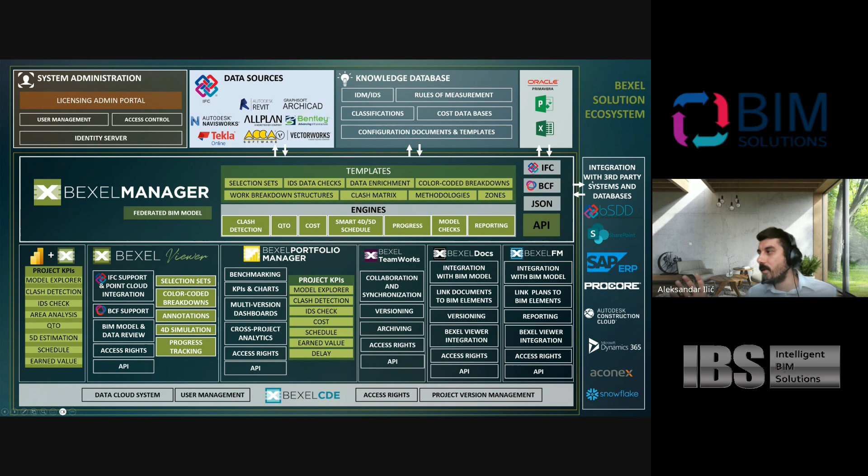Also, we have an open API that allows you to integrate with third-party applications. So if you're using an ERP system, with a small add-in, in a matter of weeks, we can create a direct link between your ERP system and your Bexel Manager solution.

Okay, so our software solution is not limited in any sense to some standardized cost classification system. The system is completely open. If you have your own internal classification system with your own coding, that's completely fine. We can integrate it with Bexel Manager with no problem. And if you're using the same coding system in your ERP, then connecting your ERP and our Bexel Manager is a very, very easy and straightforward thing.

Right now, I'm going to skip to the live demo. This is one of the sample projects which we developed with a company called CGS Labs from Slovenia. They are creating solutions for designing roads and infrastructure projects generally, but the approach is very similar. The basis is basically the same as with Civil 3D. It's creating generic models, which are then automatically enriched with data in their solution.

And in Civil 3D, you probably do that with Dynamo scripts and so on. So this is the same approach, and we can even share this example with you if you want, because this is a sample project that was created exactly for demonstration purposes. So, how our software works. This is some basic infrastructure project, a railroad infrastructure project model that probably looks like any model that you have.

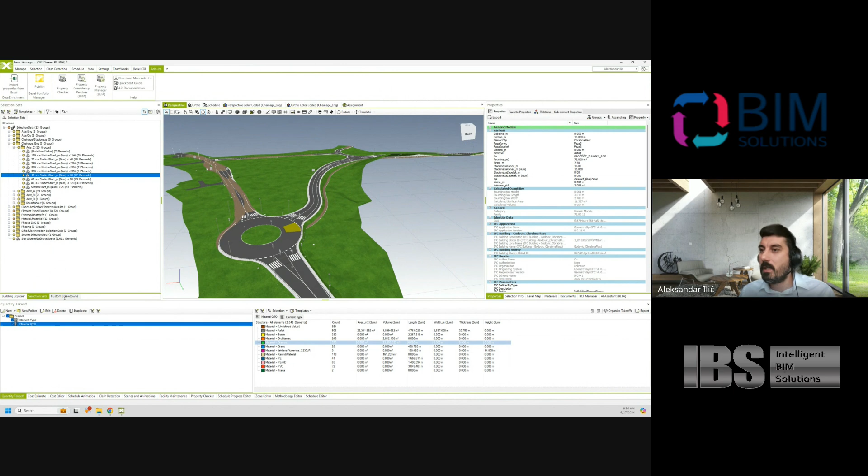The only prerequisite for Bexel Manager, for a good implementation I would say, is that it is modeled in a certain way. So now I'm giving you recommendations that the model is subdivided. Let me just find some of the examples. Let's say that it's subdivided in sections. Why? Because when you're planning your linear projects and executing them, they're going to be executed in sections of 20 meters, 50 meters, 100 meters, whatever the technology of execution is. So we always recommend to designers and to people starting to implement BIM: when you're building your model, try to cut it into sections, because then your schedules are going to be much more realistic.

Because if you have a stretch of road that is 5 kilometers long, and you say that this 5-kilometer stretch is going to be executed in 6 months, then you don't really have good control of your schedule. After the third month, it's going to be very hard for you to know if this is really going to be accomplished in 6 months. But if you are subdividing your linear projects into smaller pieces, then you can have, I would say, time gates.

That's how we call it basically, so that you know that, okay, this one stretch of 20 meters or 50 meters has to be executed in a week or 2 weeks. So you have a very clear idea if the people on site are meeting their milestones or not.

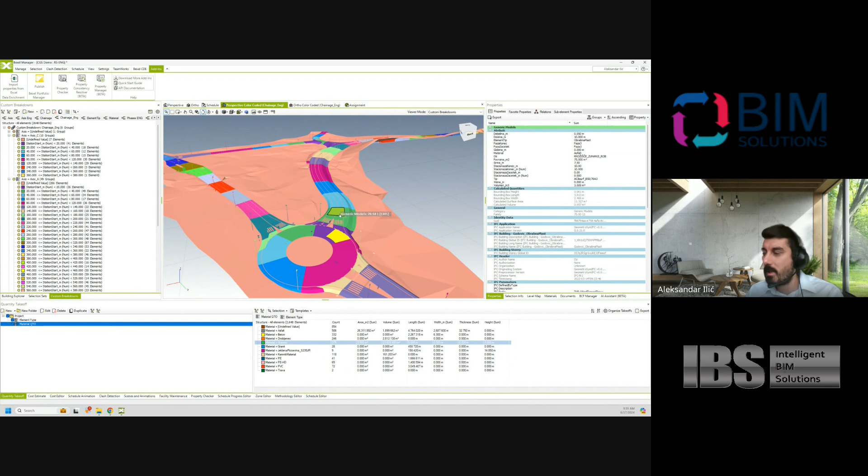And if they are not, then you can react, you can talk to them to see if you have enough resources, if you have enough time, if you have a good planning, if you have a problem with the sequence. You can immediately react and you can immediately see where the problem is.

Some of the basic information that is relevant for the infrastructure project, especially linear, is just a set of parameters, and you can see it here. So for this specific project, it's like 15 different parameters, so nothing too big, I would say. What is important here is that we specified element type. This could be element type or the cost code.

It doesn't matter. You just need to classify your elements, especially in the infrastructure, especially if you're using a tool like Civil 3D. It is important that you have some sort of parameter that differentiates excavation, backfilling, curbs, asphalt layers, and so on. So it is always good to have a system, and I guess that you have one, that differentiates different types of elements, or to which cost group it goes.

That's also okay. Maybe you could have a code 1006, that means this is the asphalt, or 1007, that means this is the excavation. That's also valid. Any approach that differentiates, I can even show you here. So in this specific system, this is a project from Slovenia, we have element types. So we know exactly which element is which element type.

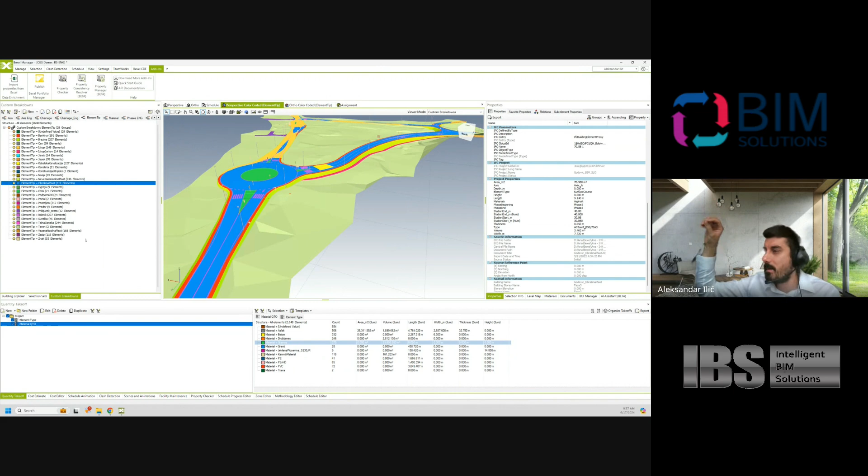So we can differentiate them, and then when we do the cost integration, we can actually know, okay, these elements are the asphalt layers, these are backfilling, these are traffic lights, and so on. So that is the first set of information that needs to be in the project for good coordination: classify your elements, it doesn't matter what the classification system is. It could be completely internal, like in this case, specific for that market. So there's no limitation in that term.

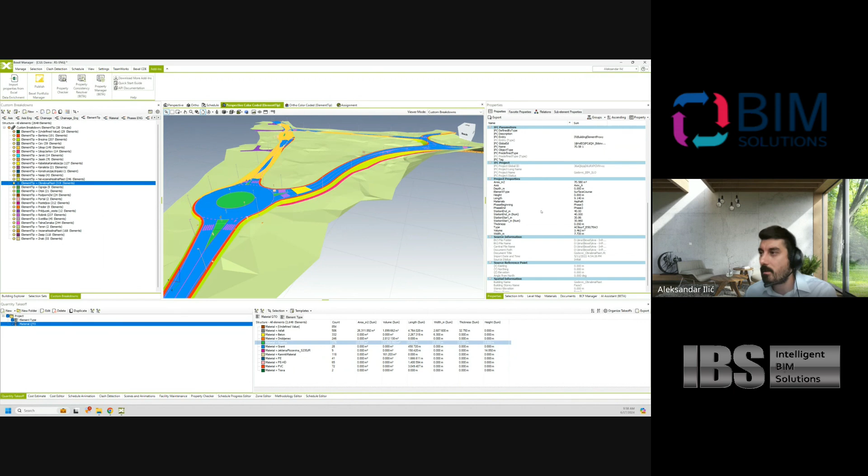The other set of properties are, of course, quantity properties. You have to make sure that you have the proper quantity for calculating that specific type of element. If it's asphalt, you probably need area, because without area it makes no sense. Maybe in some cases you need also volume. If it's concrete, then you almost certainly need volume. If it's a curb, you need length. So you need to make sure that all those specific types of elements have the proper quantity calculating property.

Another important thing is axis. That's also important in linear projects, if we want to manage them properly in BIM, that you differentiate different axes of your project. In this specific case, those are axis A, B, C, D. It could be the main highway axis, then some access roads, then some railway line that goes across. It is important that you differentiate different axes so that you can even plan them as separate axes, because you're probably going to attack them in a certain sequence.

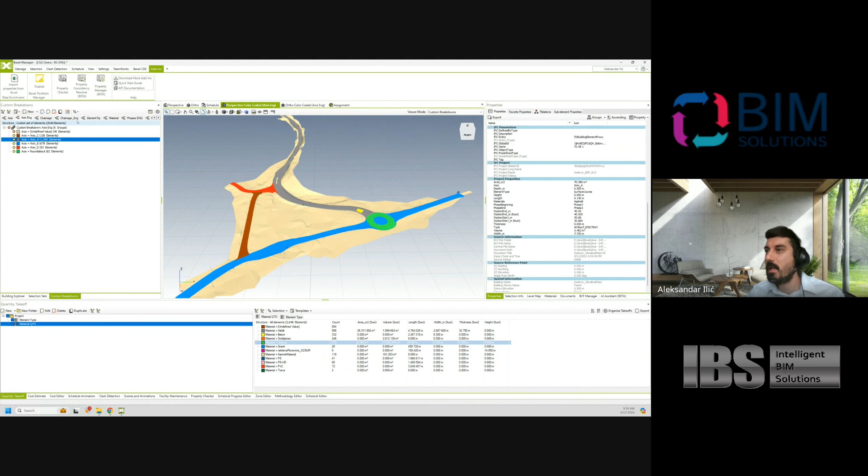And the third very important part is chainage. Chainage system means that every element on your axis has chainage. We call that stationage in this part of Europe, so we use more a French word. English call them chainage. I'm not sure how you call it in your part of Europe, but that is basically just the number that says that this element starts plus 200 meters from the beginning of the axis and ends plus 250 meters from the beginning of the axis.

And with this set of data, we can ensure that integration of the cost, the schedule, progress, or anything in BIM with our solution is very easy. So in this specific sample project, we got the model that has all of this data. We got the cost classification.

I'm going to show you how it looks. It's a completely custom cost classification, not a standardized system. It's a unique system that this specific company uses in Slovenia. So their coding, their naming and descriptions, their quantity formulas, they specify everything.

They deliver this in the Excel format, and it could be very easily integrated in our system. At every moment in Bexel Manager, you can export and import cost classification into Excel. Let me just show you how it looks like. If I do this live, let me just open it.

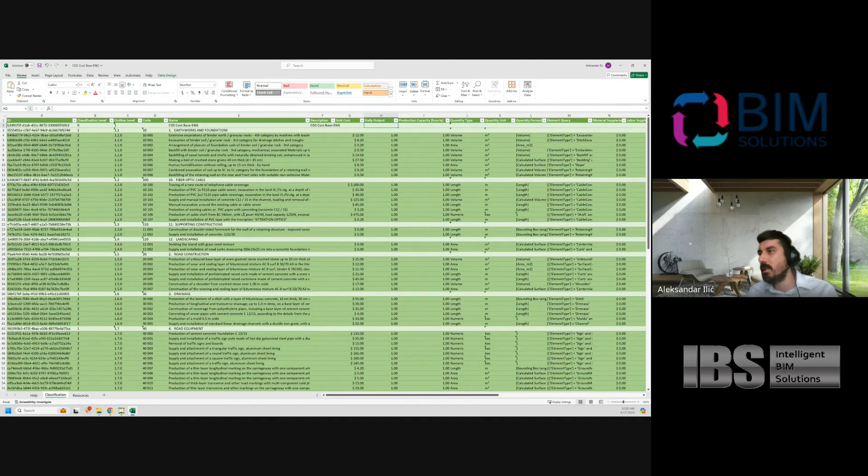Okay, this is how the cost classification in Bexel Manager looks like in Excel. So basically, any cost classification that you're using, we can simply reorganize it to be machine readable for our software. That means the code is going to be in the D column, the name in the E column, description in F, daily output in H, and so on, unit price in certain parts of the cost class. So we just reorganize it, reassemble it in order to be readable in our system, and then we import it in Bexel Manager, and it could be connected to the model.

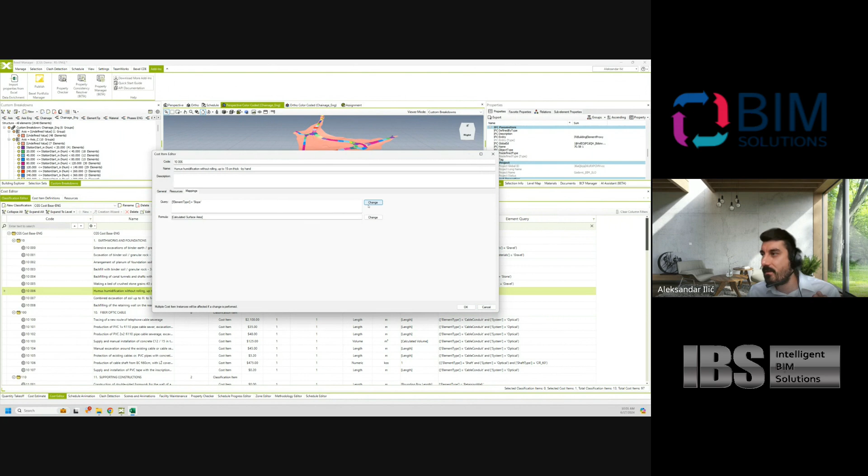How is it connected to the model? It's a very simple process where you simply specify which elements are eligible for that specific cost item. This could be as simple as, if you classify your elements by codes, for elements that are excavation of binder soil, you can just select those elements and add a property called cost code, and it could be 10001. And then our rule is simply: find me the elements where the property code is equal to 10001.

Or in this specific project, we got from the people who actually developed the model a table that says, for 10001, we need element type to be ditch excavation and material to be gravel. So if you find the element with the combination of properties, element type is ditch excavation and material is gravel, then it should go to the cost item called excavation of binder soil. So this rule is very simple.

It's very simple to assemble in Excel or directly in Bexel Manager, simply using the functionality where you say, find me the property value where element type equals or starts with or contains or ends with a certain value, and I can very simply filter out the elements that are eligible for every specific cost item.

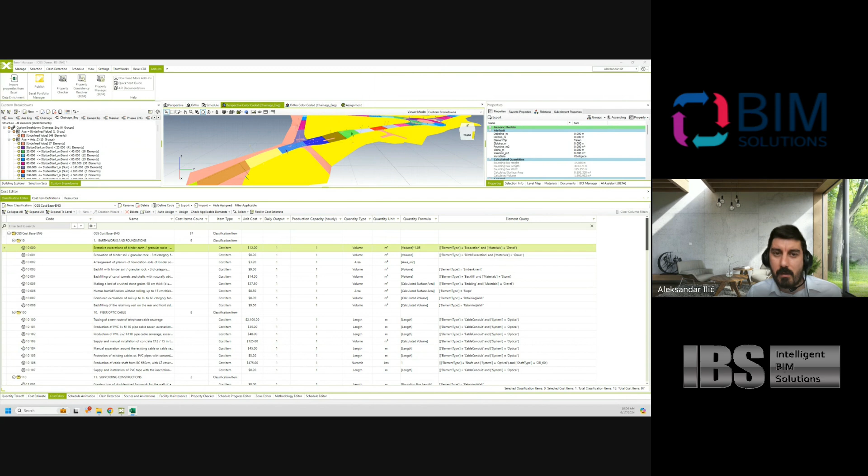And the great thing that I like about cost integration is that you can always export this to Excel and then import it back. So you can change it in Excel. You can see it right now. If I export this again, you can see that this change in the quantity formula is already there. Let me just open this new Excel. Yes, it's here. You can see that for that cost classification, I changed the quantity formula. It's already changed.

And if I change it in the next one, let's say multiply it with 1.1, and just save this, and then import back to Bexel Manager. Sorry, not this model. If I import this back to Bexel Manager, import cost classification, I go to desktop and find this example that I just changed. It just overrides the quantity formula. So everything you see here could be changed in Excel and imported back to Bexel Manager.

It's very easy to change it. And I would say that engineers are very used to this system. You know, it's easier for them to do something in Excel, import it back, than to go and do it inside the software in some cases. In some cases, it's easier to do it in software.

So this is how you import your classification system. So you specify here your unit cost, you specify here your quantity unit, quantity formula, element query. Then you simply auto-assign this to your model. This means that when you auto-assign it, the system will go through your model. It will find the elements based on these rules that should go to every group of works.

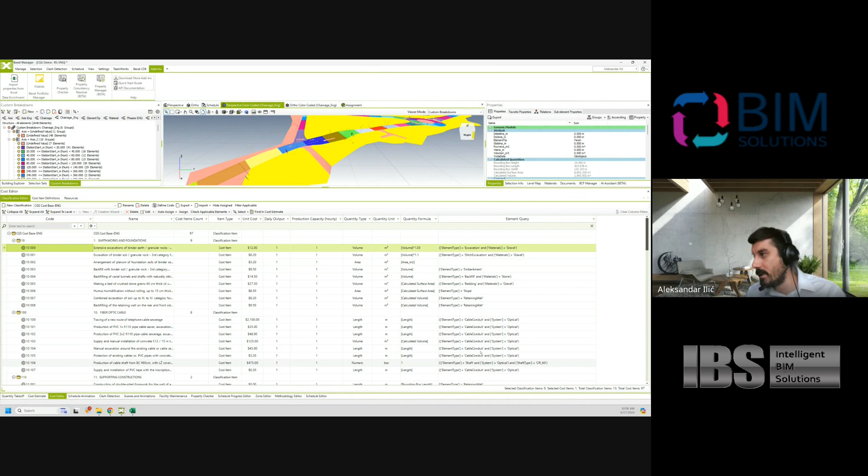It's going to calculate their quantity, multiply it with their cost, and it's going to create the budget. And you're going to get the budget like here. And this is the simple example where we don't work with the resources.

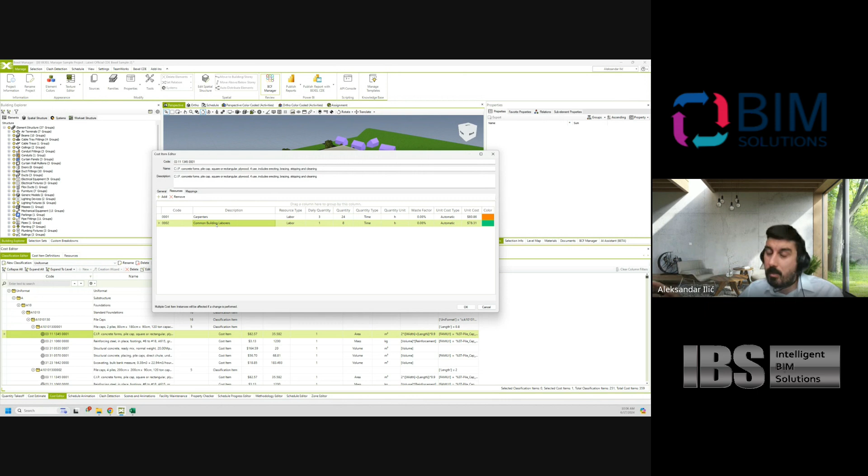I'm going to show you an example that is not from infrastructure, but again, it's a similar system where you have the ability. If you go to the cost editor and you find the Uniformat, you have the ability to assign resources directly. So this could be done in infrastructure, high rise, doesn't matter. I'm just showing you the sample that I'm allowed to show, where you can calculate the price of your cost items by simply specifying the price of your resources.

Just would like to add. Sure. So the first way you showed, it means that those prices you are just calculating including everything, and you just set price per quantity. And here it's more detailed planning. It means resource based, labor, machinery, and so on. Exactly. So there are two options of detailing, let's say.

Yes, I would say there are three options, because you see the first system, we just use the simple system where we said the unit price is 12 for the cubic meter. But let's say that I don't have a detailed resources list and detailed prices, but I know exactly from these $12 or euros how much I pay for material, how much I pay for labor, how much I pay for equipment, or how much I pay for subcontractor, because you have very different scenarios.

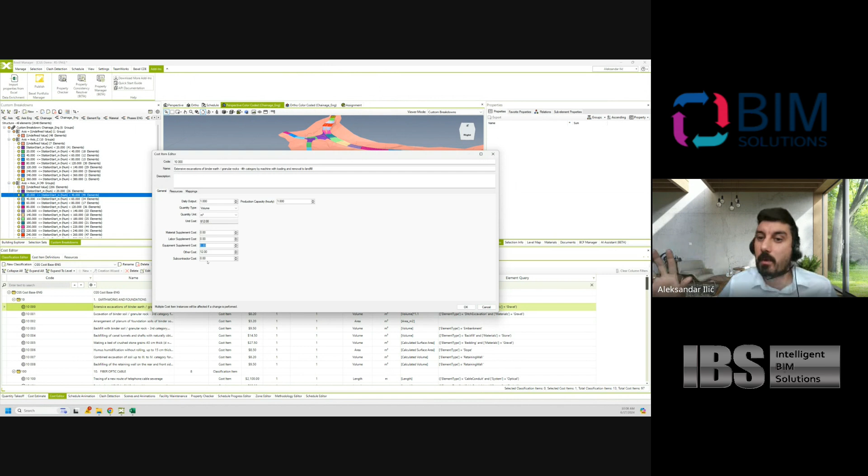If you're an investor especially, you have a situation where you are buying material and you're paying a subcontractor to actually construct it. So you don't have labor or equipment. That's not your cost. You have material cost and you have subcontractor cost.

But in some cases, maybe you know that for 1 cubic meter of excavation, you don't have material at all in that specific case, but you're gonna pay labor, 30 euros per cubic meter. You're gonna pay equipment $0.5 per cubic meter, or whatever you calculate. That's also one of the approaches, between what you said, price per quantity and price by resources.

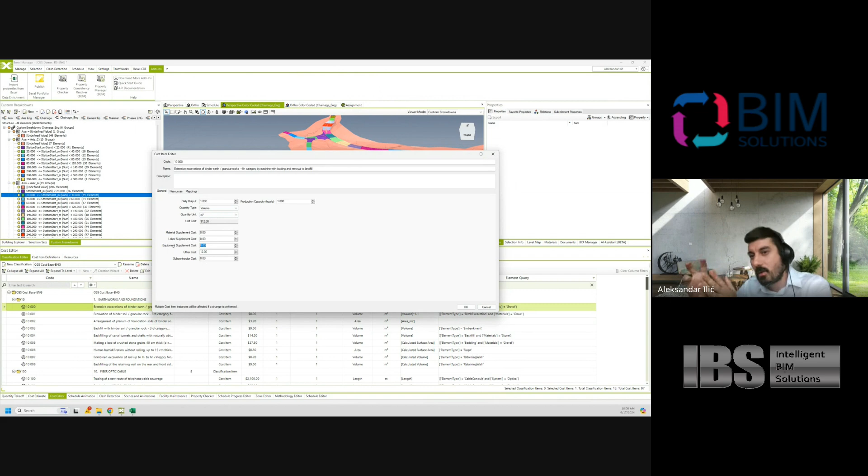This is price per supplement, when you don't have a detailed idea about the resources, but you have an idea which percentage of your unit cost goes to materials, which one to labor, which one to equipment, and which one to subcontract. So then you would just simply create your resources list and specify, this is the labor resource, this is the equipment resource. You have coding for those resources as well.

And then in your cost classification, for every cost item, this is budget. So if you go to cost classification and go to any cost item, you can simply add the resources from your resource list, and you can specify, for 1 cubic meter of excavation, I'm using 0.5 hours of work of my common building labor. I'm using 0.15 hours of work of the supervisor. I'm using half an hour of work of the excavator.

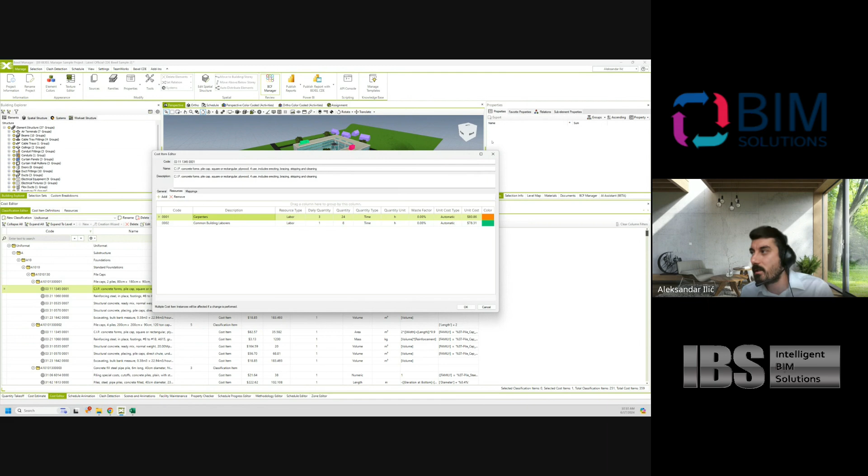I know the prices of these. I can add the waste factor as well, because maybe I'm wasting some time and so on. And then your unit price in that case is calculated directly based on your resources. And whenever you change the price in your resources list, the price will be recalculated for the cost items as well. So the costs are directly calculated

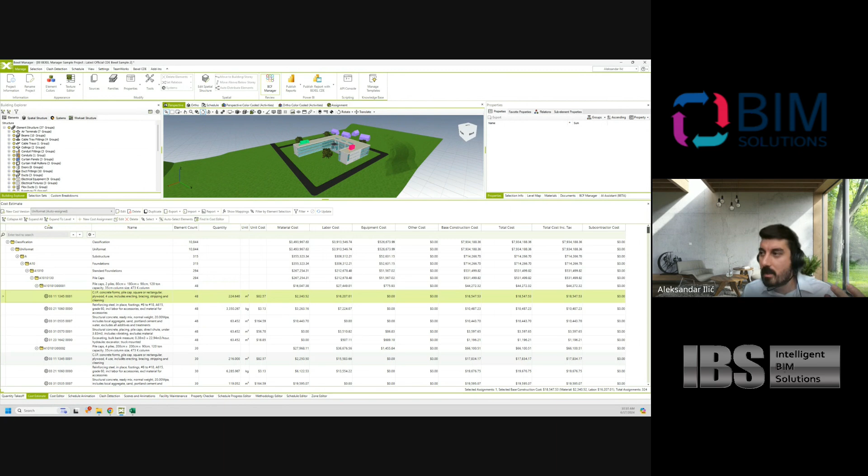from the resources there. And when you create your budget, you can see exactly which part of that cost item and overall budget goes to material cost, equipment, other costs, subcontractor, and so on, based on the resources that you specify. So that is very important. And those resources are going to be visible also in the schedule, which is a very important thing as well.

So let me go to this actual schedule task report. You see, of course, the cash flow, the cumulative cost, so you see the money, but you're also going to be able to see resources.

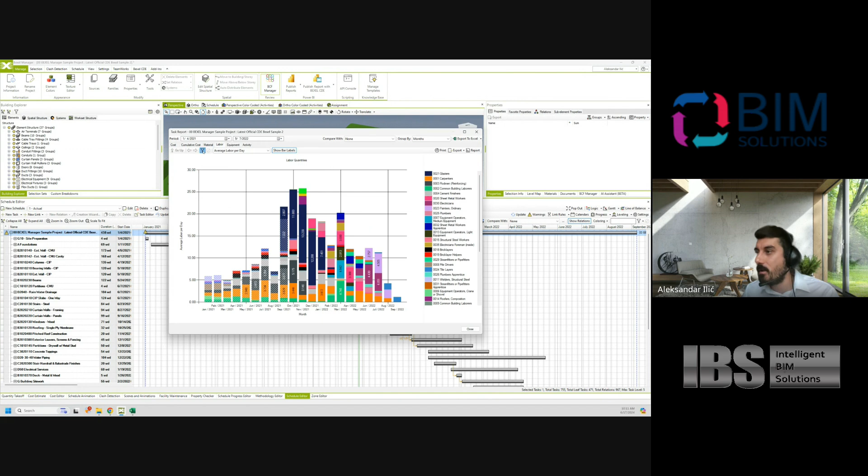So you're going to see, let's say, if you check carpenters, how many carpenters you're going to use with this schedule every day of your construction. You see that this is not optimal use for this specific project - you're going from 1 to 1.5, then jump to 2.5, then back to 1, and so on. So obviously this was not a very good schedule in this example, because your resources were not leveled.

What is also great about our software is that we have resource leveling. So you have the ability to say, maybe you have 3 excavators that could work 12 hours a day - that's the amount of hours you could have because you have, say, 2 people working in 2 shifts and so on. And you could create your schedule.

In order to determine realistic duration, you can select the tasks for the excavation, for the site preparation, and say that for these tasks I could limit daily output to 12 hours of excavator, and it's going to extend duration based on the quantity of excavation from the model and the available resources you have.

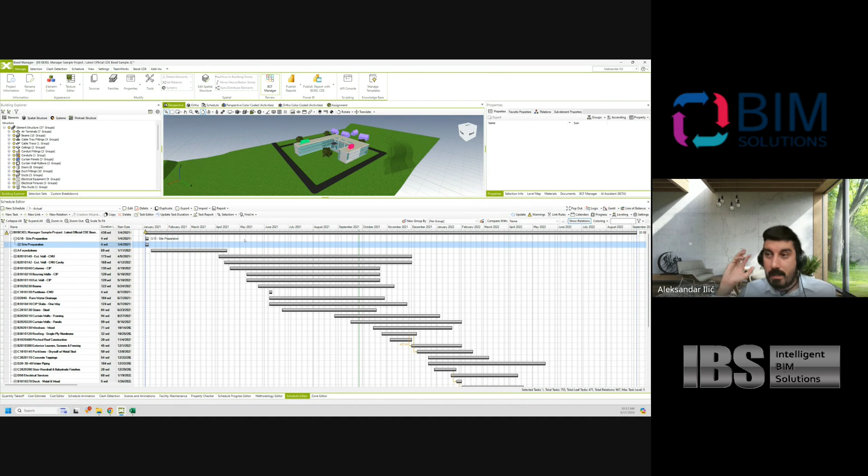Again, there's no limit in terms of whether it's an infrastructure or high-rise project. The cost implementation system is the same, the scheduling system is the same, and you're going to be able to see both. The only question is whether you have this data - your resources and detailed cost classification specifying how many resources you use for every different cost item. There's no problem integrating it in Bexel Manager.

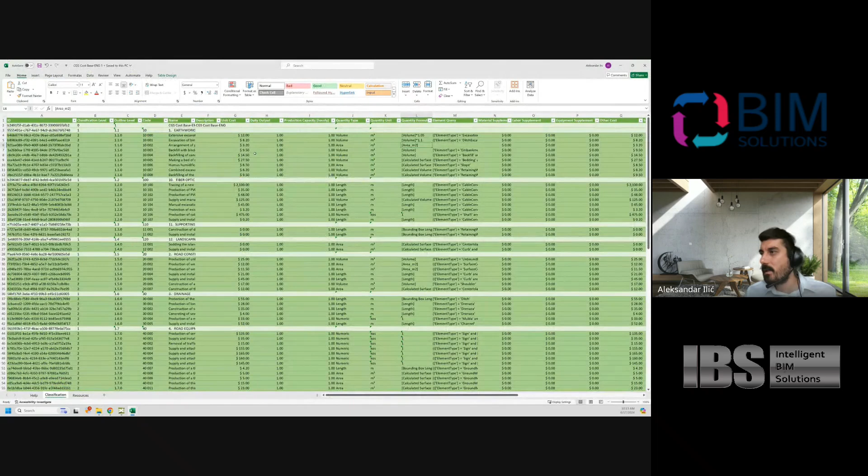And again, if I go back and export this to Excel, the same as we did with the linear schedule - if I export to Excel, to cost classification, this specific cost classification just opens directly here. So I'm going to open this Excel file. You're going to see that the resources could also be managed in Excel and then imported back to Bexel Manager.

So for every cost item, it specifies the resource - carpenters, common building laborers - how much time you're going to use for which daily output. So how many hours you use for which daily output, for how many cubic meters of concrete. You have your detailed resources list here, and you can change this.

Maybe on the next project you have a different company delivering you concrete because it's in a different part of Lithuania - they have different prices, different capacities. You just go and override this, import it back to Bexel Manager, assign it, and it will automatically change your budget. What is the main advantage of this approach?

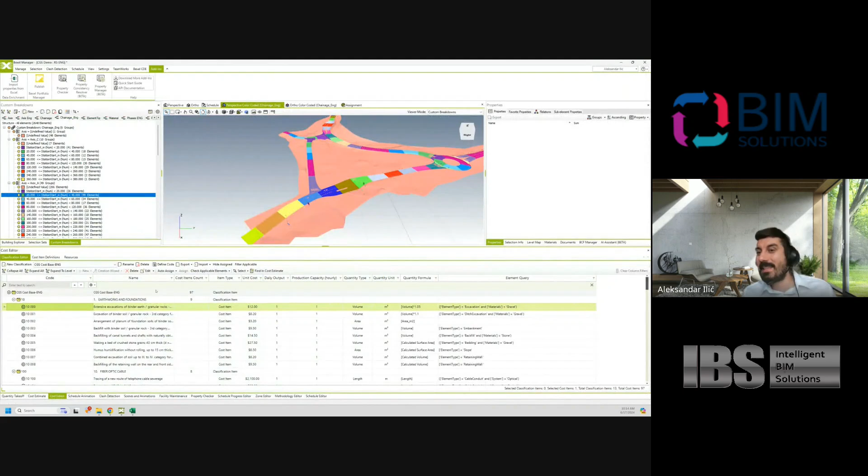Because people always ask me, okay, but if I have to spend time to develop the cost classification, to integrate it, to assemble the rules and everything - yes, it's going to take time on the first project. After that, you simply export this, send it to the next project, and people could use it right away.

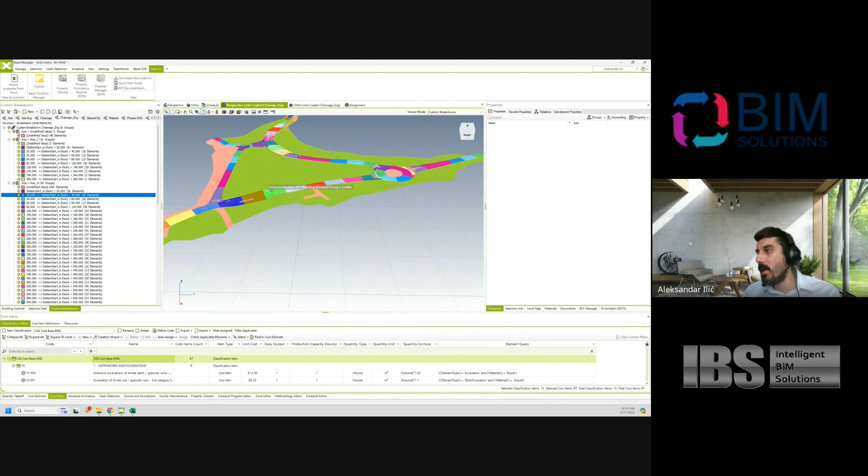Also, the first time - when people send you changes and say, okay, we had some problems buying the land, so we had to reroute this axis a little bit - instead of you going and recalculating everything manually, you just update your project, simply click refresh, and it's going to automatically recalculate your complete budget, recalculate everything in the schedule, and you're going to get everything updated with a few clicks.

And then with the first change, you're going to save so much time that it's going to pay off everything that you did in terms of implementation and integration of the schedule.

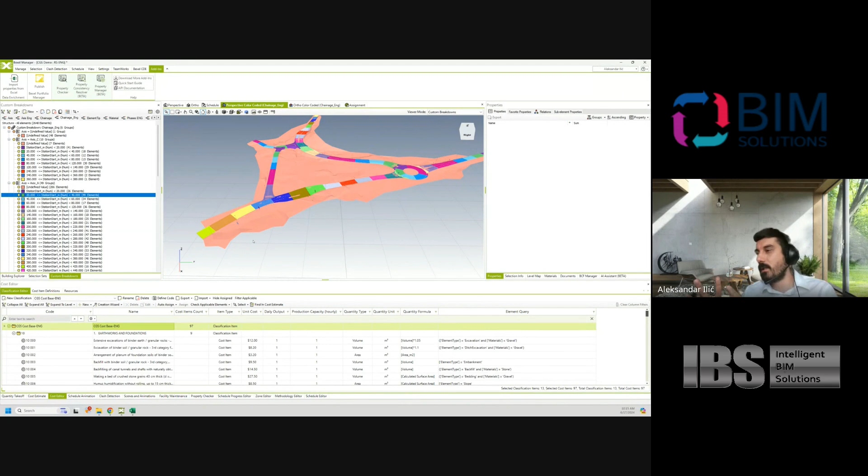So this is about the cost. I would also like to cover a little bit the 4D. So the part of, once you create your cost, when you integrate the cost, creating the schedule in Bexel Manager is very easy. You have two ways.

You can create your schedule in Primavera P6 or in MS Project and import it directly. So you have the ability to import from MS Project or Primavera. If you're used to working in MS Project, you can import your schedule and then link it with the model elements in some intelligent way. Let's say if you have codes for every element showing which task it goes to, then we can automatically map the elements that contain a certain code with the task that contains that code.

The system is pretty similar to the cost system. That's one approach. It's harder if you do it that way, but some people prefer it. Another approach is to create the schedule directly in Bexel Manager, and this is specific to our software only, where you're able to create what we call... maybe I'm going to share it.

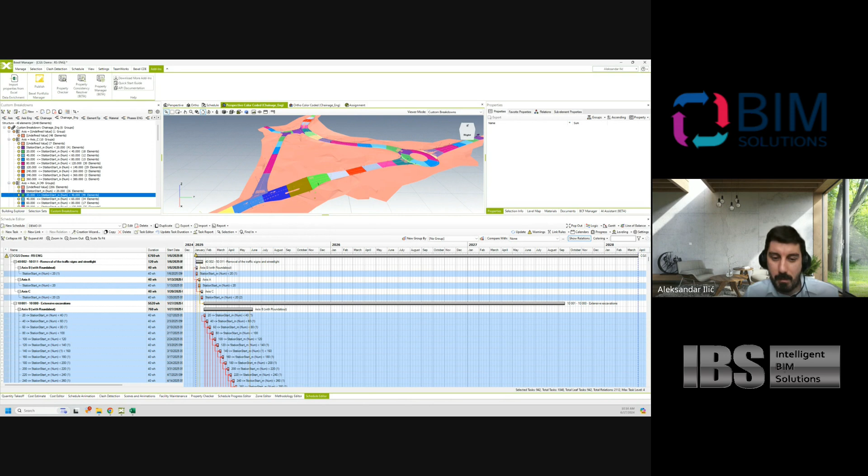The best way is to share my screen to explain how the system works, because I have a very good graphic for this. Let me just do that, and then we're going to return back to the practical example as well. But here's how this works.

Since your model already has cost classification integrated, whenever you click a certain element, you can see which groups of works that element is connected to. So when you click on the asphalt layer, you're going to see exactly that it's connected to the subheading in your cost classification called asphalt, and then you'll probably have different cost items for asphalt of 10 centimeters, 12 centimeters, 15 centimeters. They're going to be built differently, and you'll have different resources and quantities assigned to that specific cost item.

When you go to the scheduling part, what you basically do in every scheduling process is create spatial project organization and work sequence definition. So in this very basic example, if it's a building or multiple buildings, what you'd do in MS Project is create a parent task for building 1 and building 2, and create some relationship between them - you'd say, okay, I'm going to start with building 1, then with a 2 month lag, I'm going to start with building 2.

Then in both of these buildings, you're going to create a subtask for every floor, from the ground floor all the way to the roof. Then in every floor, you create a phase, or takt in German - you subdivide the floors into areas of equal size so you use your resources in the best way. You don't attack the complete floor at once; you work one third of the floor, then another third, and so on. That's your spatial project organization, which is what you'd do in MS Project.

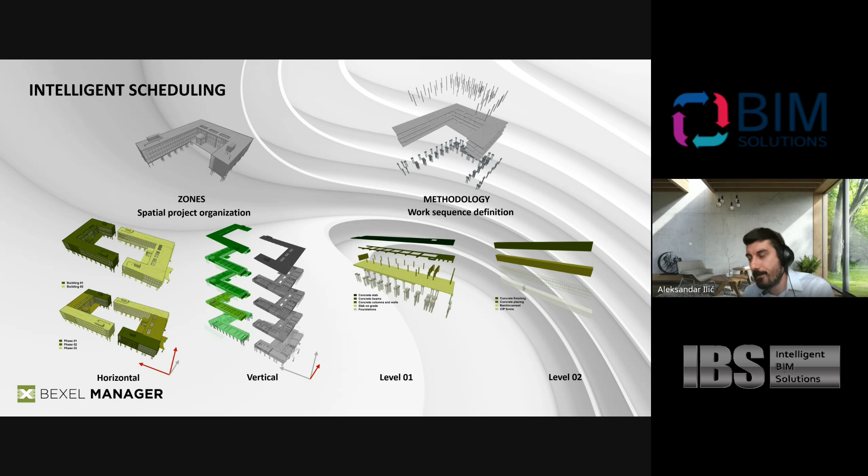It's, I think, 12 kilometers long, and it has a few sections. So it has a viaduct, a tunnel, and 3 different open sections. So what we do is we subdivide them into these sections and create the sequence between the sections.

We're going to start with the tunnel first. Then after we complete 20% of the tunnel, we're going to start with the viaduct. After we are at the half of the viaduct, we're going to start with the open stretches of the railway. Then we subdivided the viaduct and all of these sections into subsections of, let's say, 100 meters, 50 meters, whatever is practical to us. And for every one of these subdivisions, we specify a sequence of work.

How did we do this? We refer to our cost classification system. So if in our cost classification system we have a group of work called excavation, we say first we execute excavation. After excavation finishes, we're going to execute, say, piping for the infrastructure project. So we excavate the trenches, put the pipes, backfill. After that, we do the base layers, then the sub-base layers and compact that, then the covering, the asphalt covering.

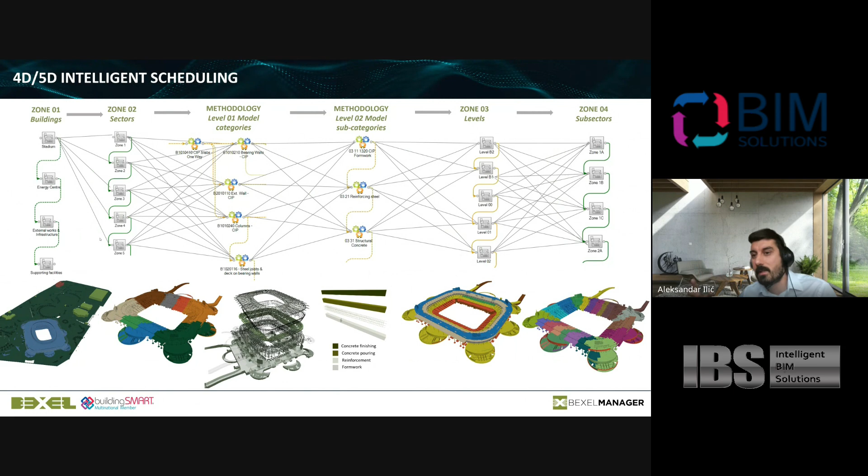This is just one example; we did the same thing for the FIFA World Cup stadium in Qatar, which had over 100,000 tasks and relationships. But we did this in basically a few days because we just specify zones and subzones of the stadium, the technology of execution, which groups of works are executed in which order, and then it just subdivides all of this into a schedule.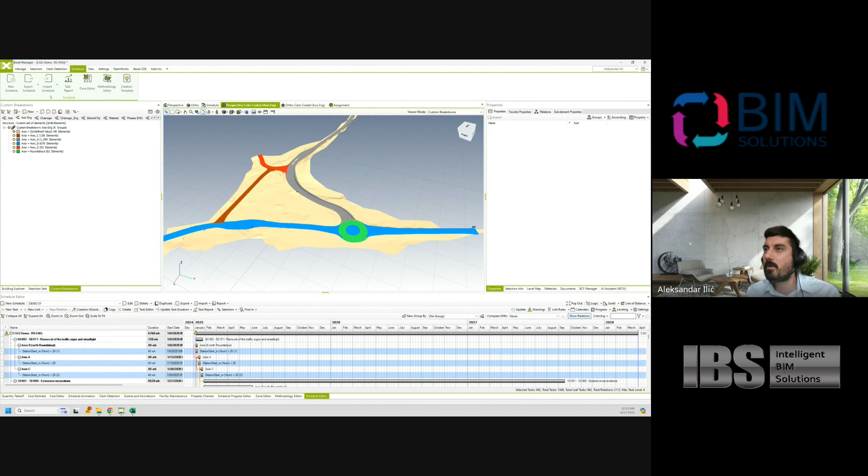So in this concrete example I'm showing you here, we created the schedule the same way. We subdivided this project into axes, so we have information in Bexel Manager that this is axis A, B, C, D. Then in schedule and zoning, we specified the sequence for the axis: we're going to first build axis B, then axis A, axis D, axis C. That's a priority system we specified here, because in this specific part of Slovenia, axis B is the most dominant one.

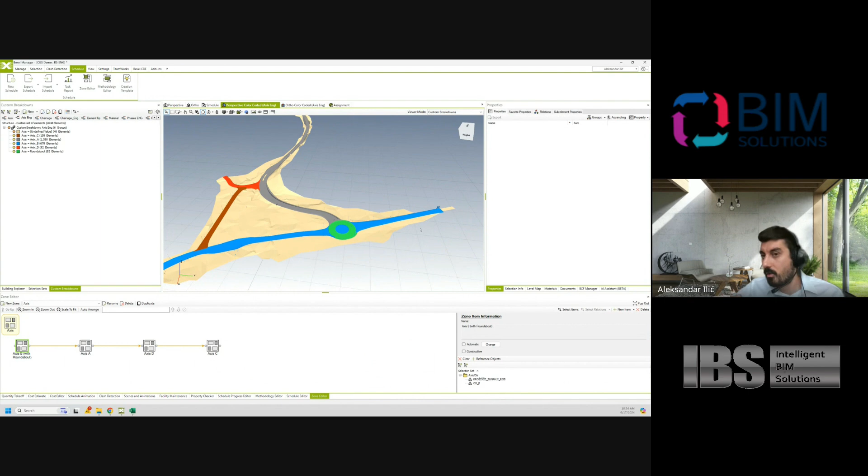So we need to complete the work there so the traffic can go with no problem. Then we have the second priority axis here, and the additional ones are our lowest priority, which we're going to execute later. Then after that, we created a chainage system.

For every one of these axes, we subdivided it into 20-meter sections, because that way we can organize our work into more or less equal amounts of resources and equal amounts of time needed to execute. So we know that, say, we're going to execute 20 meters of excavation in 3 days, 20 meters of backfilling in 5 days. So we have very tight normatives, a pretty clear idea of what we need to invest for this logic. If we just say we're going to execute this 1 kilometer or half a kilometer stretch of road, we don't have a very clear idea of how much time it's going to need.

We have some idea, we have some experience, but we cannot just follow that easily. If you have this as one big stretch of road containing, say, 5,000 cubic meters of backfilling, you'll say we completed 5%, then in a month say we completed 17%. How would you know that exactly? That's going to depend on the people assessing this on site to tell you what they think is the percentage of completion.

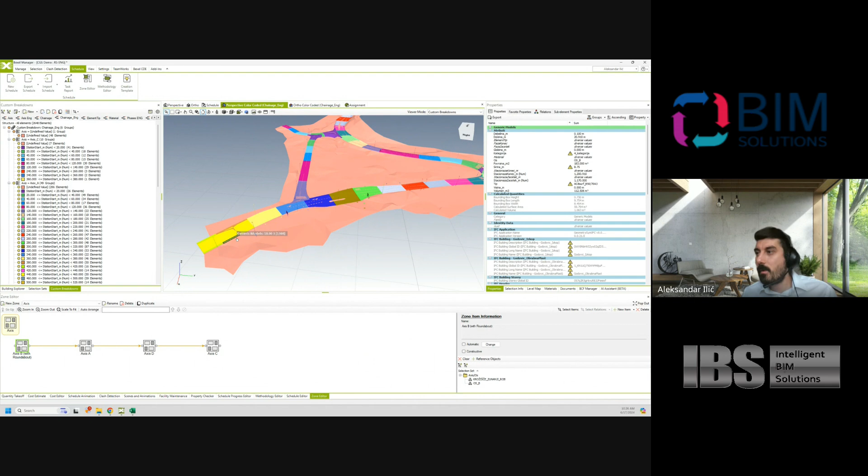If this is subdivided into sections, it's easier. You can say, okay, it's the third week of excavation, this is where we are, this is where we reached. So we know exactly how much this is in terms of quantities, resources, and money, and exactly how much time it took us to reach this specific point of the road, and how that impacted or pushed the other sections to be executed in the following weeks.

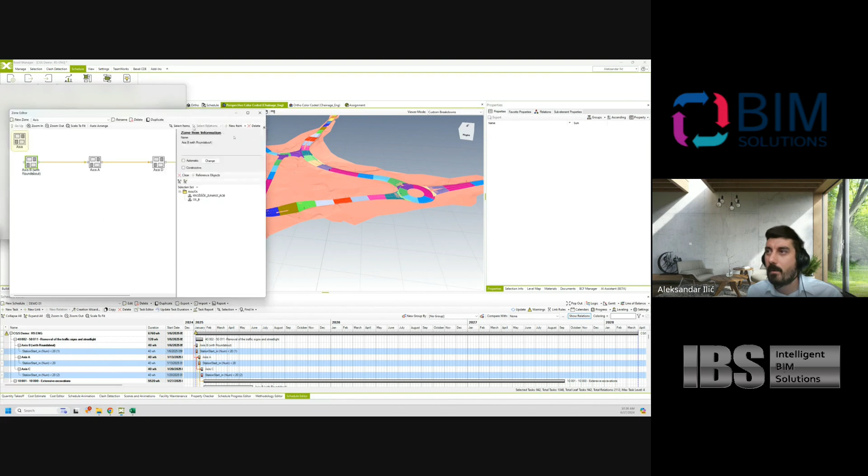So we subdivided this into subsections, and then we go to the zone editor. This looks like Dynamo, it's the closest thing to it. For each of the axes we specify a sequence of execution: we say, okay, we're going to first execute the first 20 meters, second 20 meters, and so on. Just a normal sequence from beginning to end, since this is a short stretch of road.

In some bigger stretches, maybe you're going to attack that 5 kilometers in 3 places. So you'd say, okay, I'm going to start from meter 0 to meter 200 with one team, from meter 200 to 400 with another team, and from 400 to 600 with a third team. So I'm starting at once in 3 locations of that stretch of road. You specify this, and the last part is the methodology, or the sequence of work.

What we did here, we simply go to our cost classification and said what we're going to execute first. In this specific case, you can see removal of the traffic signs and street lights, because there was an old road there, so we first need to remove all these traffic lights, signs and boards in order to start work. After that we go with the excavation, demolishing the old road, then excavation for the trenches. After that we backfill and protect the existing pipelines with concrete, then we install the optic cables, public lighting, water pipe supply. So we just specify the sequence of this work, like in any other road project.

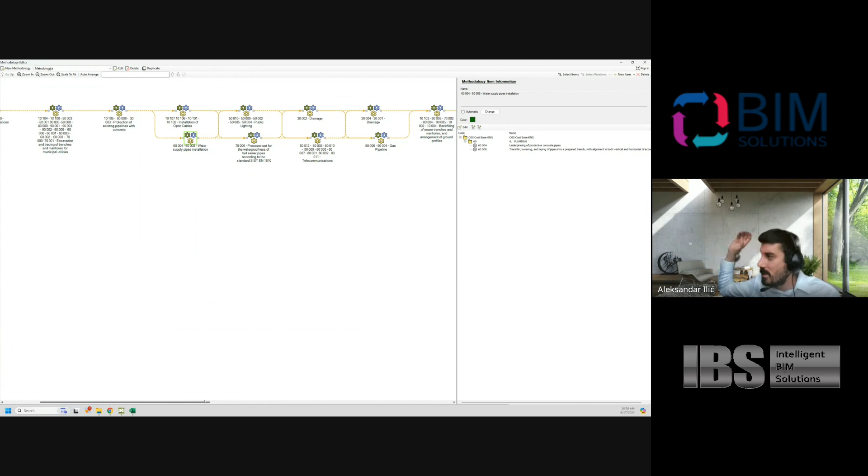You can see, especially for road building, the methodology is very simple. It's very linear, there aren't a lot of branches. When you go with buildings, you need to install, at the same time, electrical installations, piping, sprinkler system, MEP system, supply air, ventilation and so on, so you have a lot of branching there. Here it's pretty clear, you just go one by one in the same area, doing different groups of works.

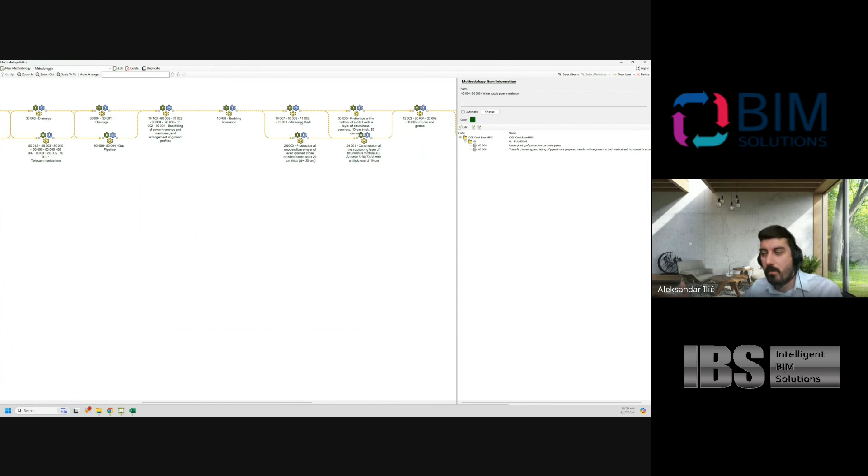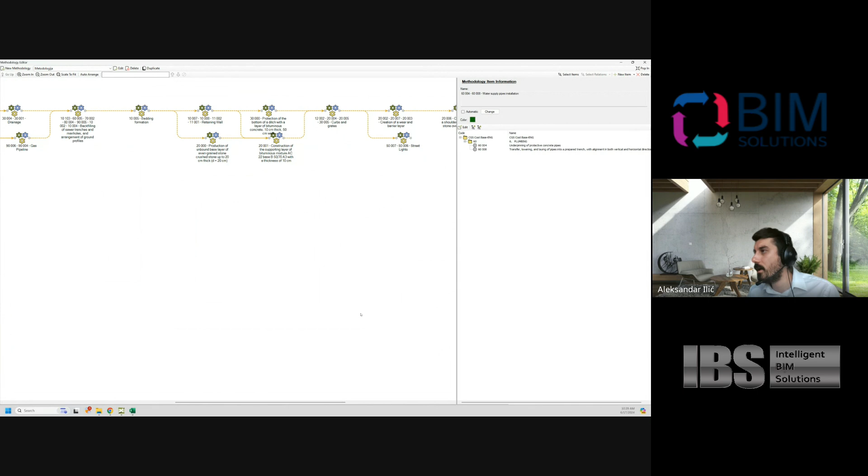After you complete all the drainage, telecommunications and so on, you backfill the trenches. You do the bedding formation, backfilling your base, making the basic layer for the road. You do retaining walls in areas where you have to cut through hills, unbound base layers, and so on. Then you do your curbs and grates, creation of wear and barriers for the cut areas, installation of street lights, construction of shoulders from crushed stones, creating the terrain and waterways, landscaping, fences, road markings, and so on. It's that simple, basically.

This is the creation of the wear and barrier layer, basically the asphalt layer here. So why is this a good system? Because when you build the next road, you can reuse the same cost classification and the same methodology, since you're going to build that road probably in the same way, even with some changes — maybe the bedrock is different, so you change some group of works. You can just change 20% of your scheduling logic, not the whole logic.

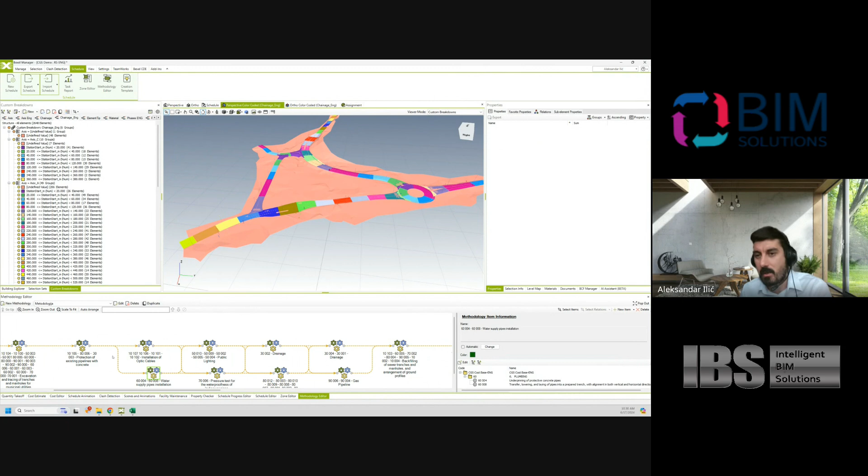And then what we do, so we said, okay, this is how the road is built, but here we have 5 different axes, and they are subdivided into chainages. So I do the logic for building the schedule only for one axis, and he can apply it for all of them. What I do then, I do a creation template where I combine all of this and say, okay, use this methodology, use this axis sequence, and use this chainage sequence.

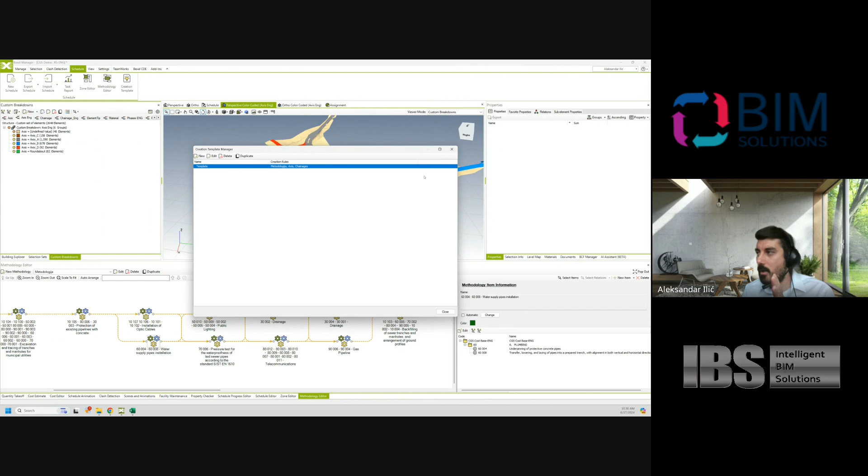And then I go to my schedule editor, and I create an empty schedule, demo 02, and I just say it is connected to my budget that I've already integrated, the budget that I'm using in my company. And then I simply click Creation Wizard and load the template that I created, the template with the methodology, axis, and chainages. Click OK, and he creates the schedule automatically.

So you can see that it has 1,048 tasks, and it has 2,000 relationships. All of this created in a matter of seconds. Of course, duration is default at the beginning. So later you go and stretch durations or shorten durations for certain groups of works. But he just simply created the sequence of work that we actually specified to him.

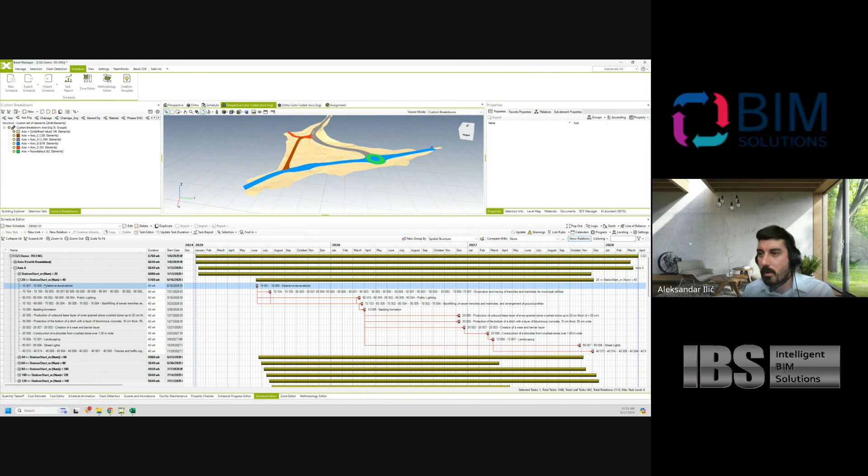And I'm going to just switch back to this one. It's the same one. And I even have the ability to regroup the schedule so that I can see it by axis first, and then subdivisions, these chainages, and then groups of works. And if I go to the schedule animation, you can see that this schedule is now not only created as a schedule, it is automatically connected to the model.

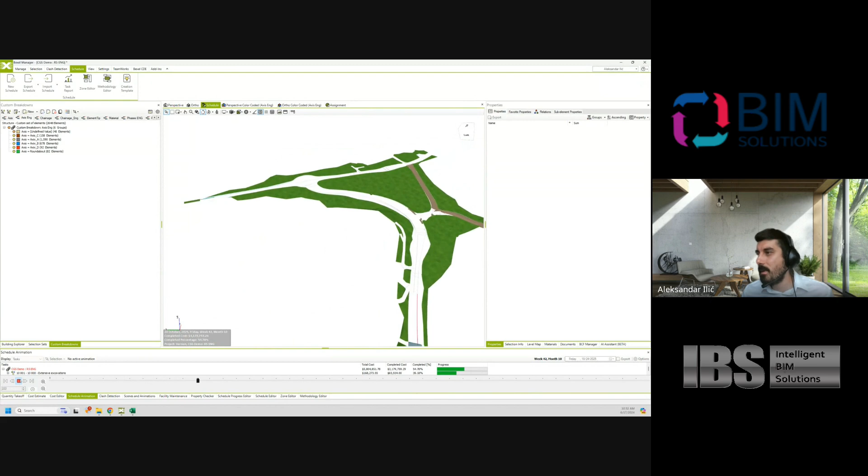So if I click animation, you can see how this specific schedule is going to be, how this road is going to be executed. So you see excavation, you see MEP lines, you see the base layer for the road, then the next axis is starting after the first one is completed with the same group of work. Then it goes the top layer, the sub base, the top layer, and of course it ends up with the traffic signs and lines and everything.

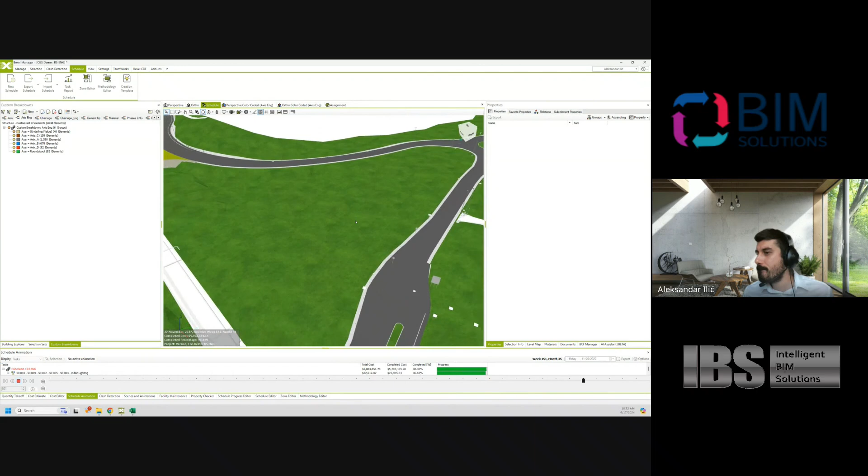And right now, I use the animation mode so that I can animate the camera moving. I can remove the cameras and return to the task. And it could be fixed like this. And I can go and look at it from any angle, basically. Return back. And I can see for every day of execution how this execution is going to look.

And not only that, if I go back to my schedule editor, I can see the price of this project as well, because the elements are right away connected to the model. If I go to the task report, I can see the cash flow, which is not good at the moment because everything has the same duration, so I need to optimize it. I can see my S-curve.

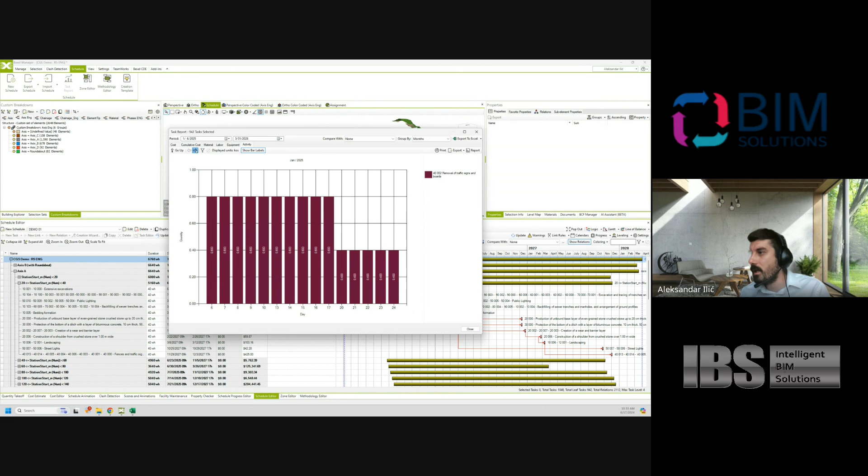If I had my resources, I don't have them at the moment, I could see the amount of resources, but I can see activity. I can see how much excavation I have to do every day. All of the things are visible here. All of the quantities that need to be executed, the same for the resources. What is also great, once I do this, I can do the progress tracking.

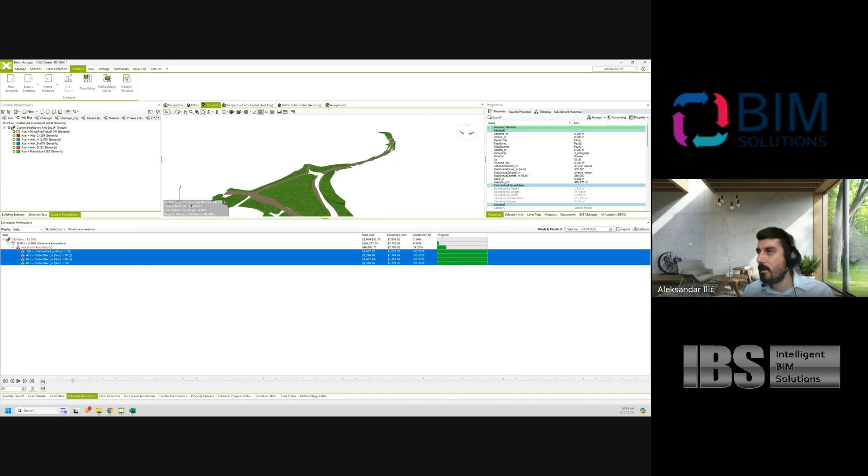So when we start execution, I can first create what we call look ahead. So if I go to schedule animation, and if I set my animation to monthly, for instance, I can go like this and say 1 month or 2 or 3 months, and I can directly send to the people on site. So I click task, select elements completed. I can send to them exactly what is expected to be excavated, let's say the first week of the project.

So they could get this, see this, go to the cost estimate, filter by element selection, and say, okay, it is expected that we excavate 489 cubic meters of this specific cost item, and that's going to cost $5,000 in this case. What they can do then, they can say, okay, but maybe we did only this. So this is what we achieved. They could go and save it in the form of a document, basically, like a new selection set, progress tracking. And all of this could be done in the online application as well.

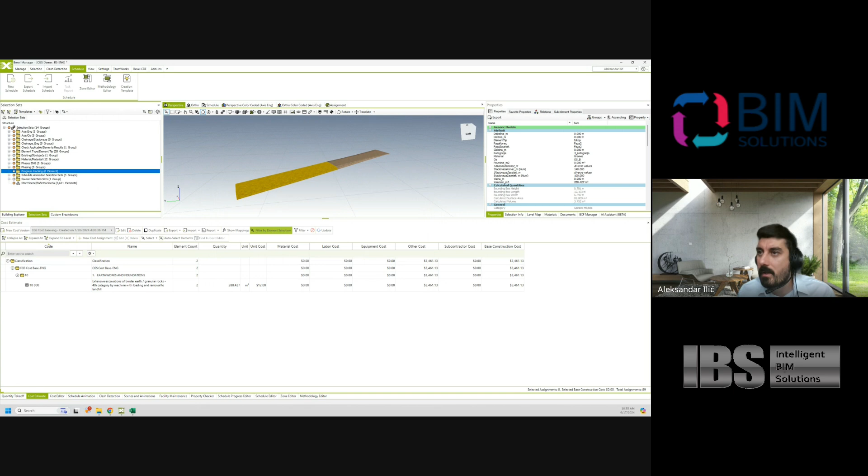I'm going to show you. So progress tracking here, and I can create a new selection set from selection. Say, okay, this is actual progress, month 01. And so I know that this has to be executed, but this is what we achieved. So I can select these elements.

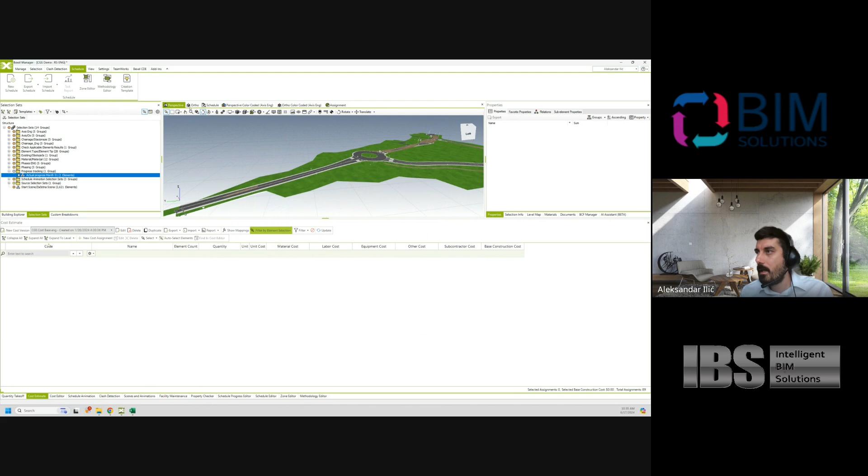And I can go to the schedule editor. I can duplicate the schedule in order to keep the baseline. So this is the actual schedule. I can set up the old one as a baseline. Demo 01 is my baseline. I can compare them.

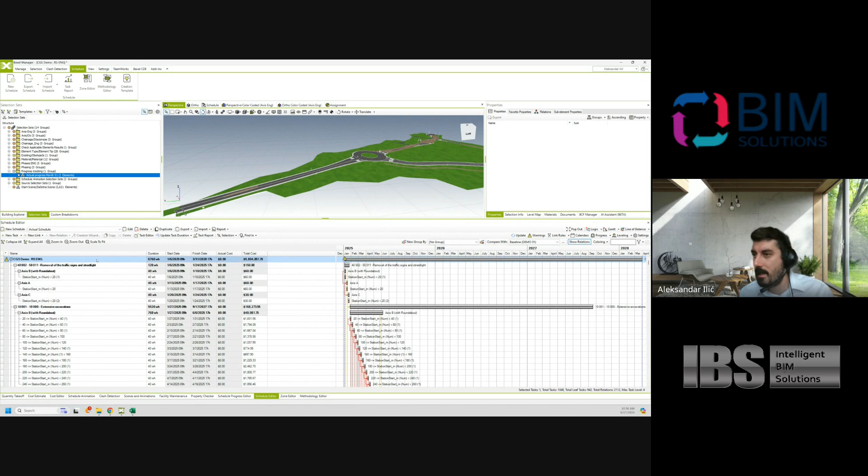So I can compare the baseline. Let me just find the none, no grouping. Okay, compare the baseline. I can see now that at the beginning, my baseline and my actual schedule are the same. Then I go to the progress. It looks like this. And I'm entering the progress.

I say, okay, new progress entry is for the first month of execution. So from January 6th of 2025 to February 6th, 2025, I call it actual progress month 01. And instead of calculating percentages or doing whatever assessment I need to do, I just go to add from selection set, and I find the selection set which my colleague sent to me.

And he says those are the elements that are completed. He can tell me if those elements are 100% complete, 20% complete, and so on. I click OK. OK. Click update. My last update, or my status date, is now February the 6th when I enter the progress. Update the schedule. And when I go back to schedule, I see that schedule is changed.

This is my baseline. Because I failed to execute as it was planned, I now have impact on my progress already. And I see that impact very clearly from the beginning of the project. So whatever you do on your project, it's going to recalculate the future. What does this mean? This means if we said that this first stretch of the road, 20 meters, should be completed in 1 week, and we have completed only half of that, 10 meters, those 10 meters that were not completed are going to be rescheduled for the next week.

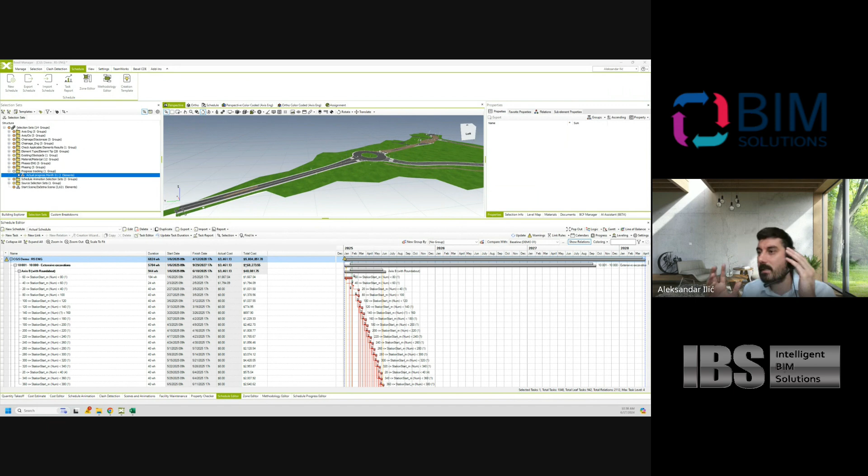When they're rescheduled for the next week, all the following works that have finish-to-start relationship are going to be pushed ahead. So you're going to see the impact of that delay. If the next week, instead of 20 meters, we execute 40, it's going to then move the schedule back, and you're going to be three days in advance from the baseline schedule. So the point is that with this system, you have a very clear idea every moment where you are on the project, time wise, schedule wise, money wise, resources wise.

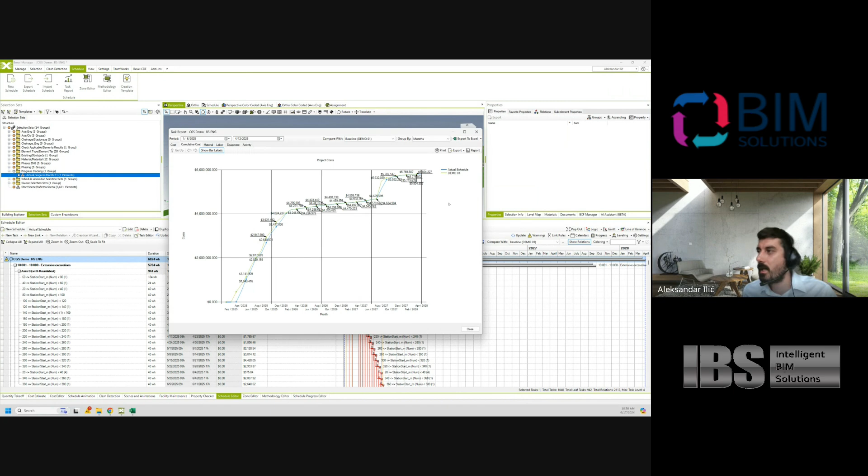Because now when you go to the task report, you can see the difference between planned and actual. You can see actually planned and actual, and difference for every day of execution. The green is baseline, the blue is actual schedule. You see the cumulative cost. You can see how the S curves are diverging. You see a lot of these things visible already here.

What is also great, once you complete all of this, you have the ability to export all the data to Power BI. So you can see planned versus actual. You can see cash flow. You can see earned value, and I can show you some examples. Let me just find this online.

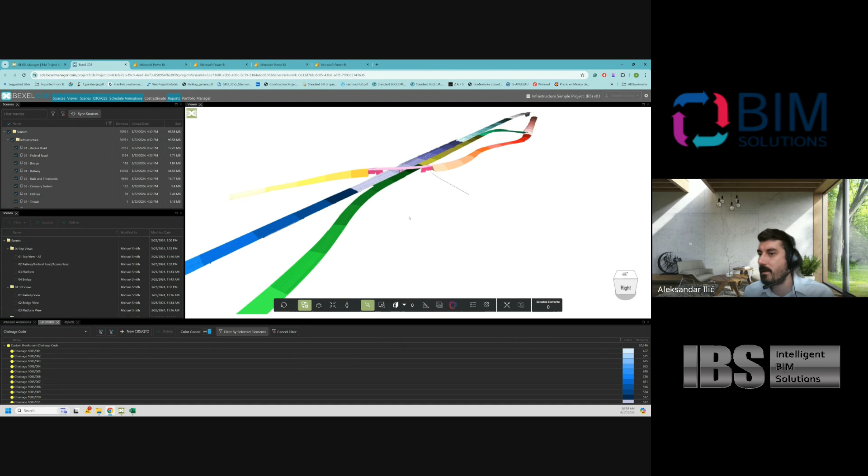So let's say chainage code, for instance. You can see how it was subdivided in this specific example, how it has different axes. Let me just find the axis system. Infrastructure. Yes, you can see what is access road, what is federal road, what is bridge, what is railway, rails and thresholds, and so on. So all of this subdivided.

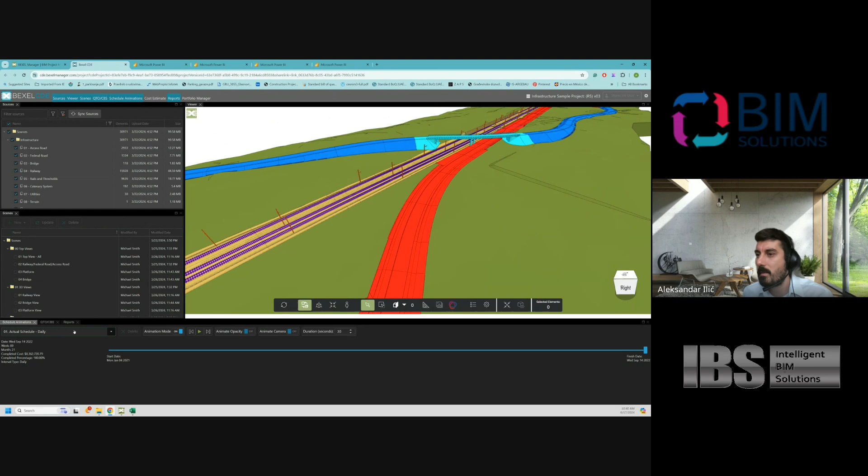You can see quantity takeoff. You can see schedule animations directly here. Let me just show you this. Sorry. You can see the animation directly in the cloud.

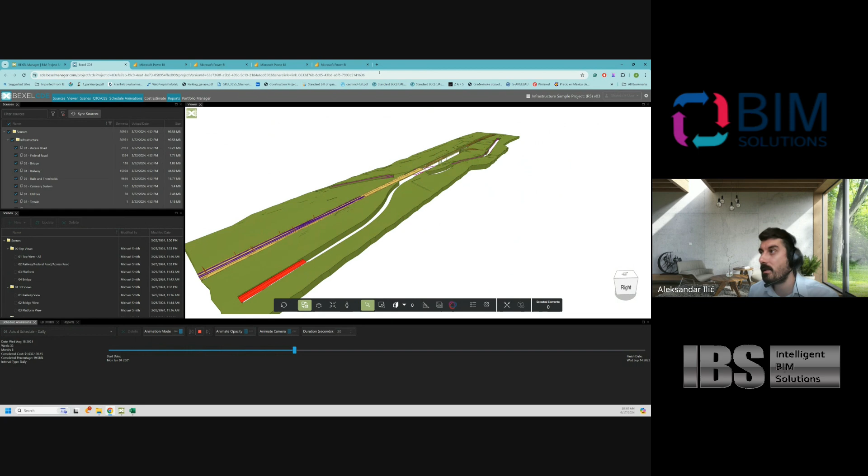So you can see how the schedule looks for that specific example. Everything that I did in the Bexel Manager could be uploaded to the cloud and shared with people like this. And this is also public. This is a link that you can access and play around with this model. Why is it very nice to have this model in the cloud?

Not only can you show this to your investor, you can share this with the other participants of the project, so that they can see this and send you back the information from the project site. Okay, this is the actual project and so on. They could save the same data as I did in the Bexel Manager, but this model could be integrated with Power BI reports like this.

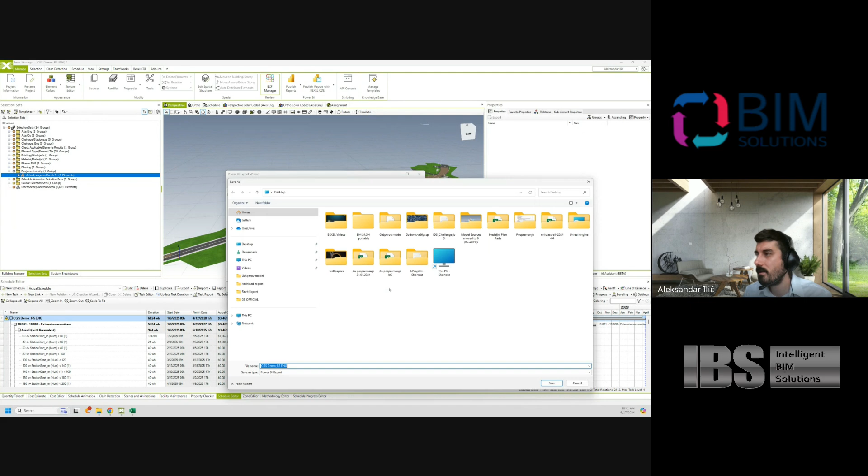And this report is actually directly exported. Sorry, let me just find this example that I showed you. Directly exported from here. So this is the planned versus actual template that you simply export to Power BI, and you get this dashboard. You simply say, okay, connect this to that specific project in the cloud, use our elements, use this specific actual schedule, use these custom breakdowns, and export this as a Power BI report to the cloud.

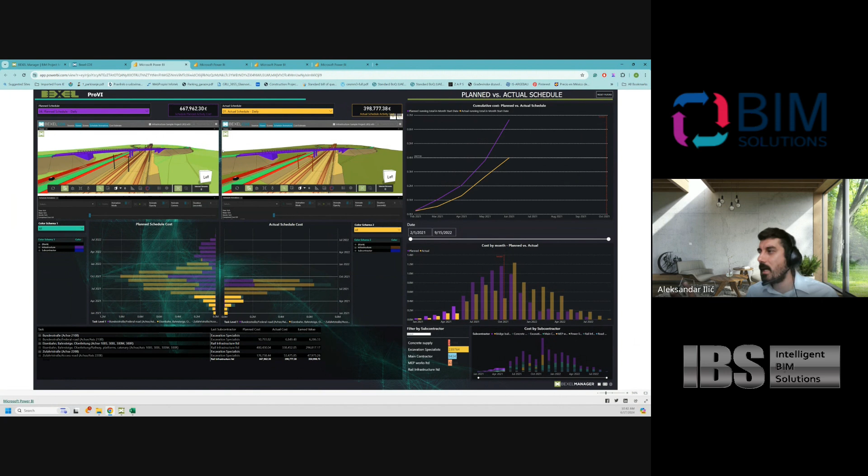It will take some time, of course, because it has a lot of data. Once you publish your report, it looks like this. You see left and right side of your project. One is planned, another one is actual. And you can go month by month and see the difference between these two models. It depends on how quick your internet is. But you can actually compare where you should be at the moment and where you are at the moment.

But it's also possible to compare directly in Bexel? I mean, visually. Yes, visually, not with two screens, we are developing that. No, within one screen. Yes, in one screen, of course, that's no problem. And you see all of this data in Bexel as well.

But these dashboards are good for reporting, because you cannot expect your boss to install Bexel Manager and go through it to see the results of the project. You cannot expect on your weekly meeting on the construction site to open Bexel Manager and show them all of this. It's much easier to export Power BI and give them the link so everybody can see left and right side and the model. So this is the main purpose.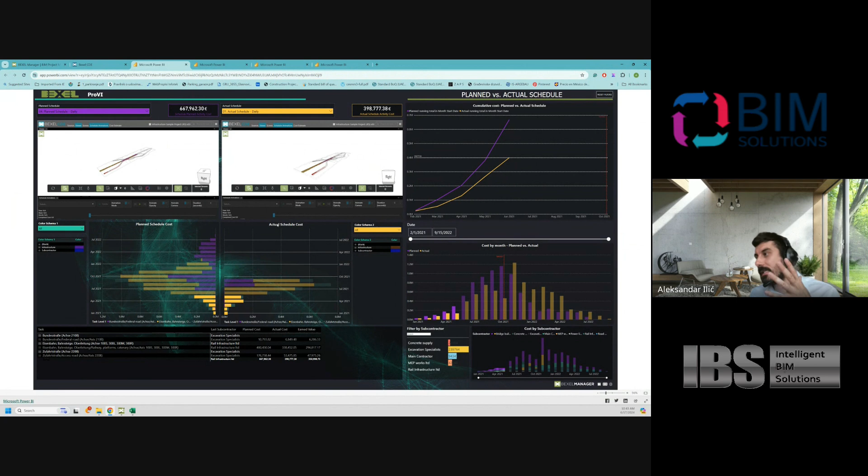Why is Power BI also good? Because besides this standardized report, we were also able to create specific reports for linear projects. This is a linear project, and in this case I made this Power BI report to map the deviation in days between the planned schedule and the actual schedule. Where deviation was positive, from 10 to 20 days before the planned schedule, it's green, going to minus 120 days where we are 120 days in delay.

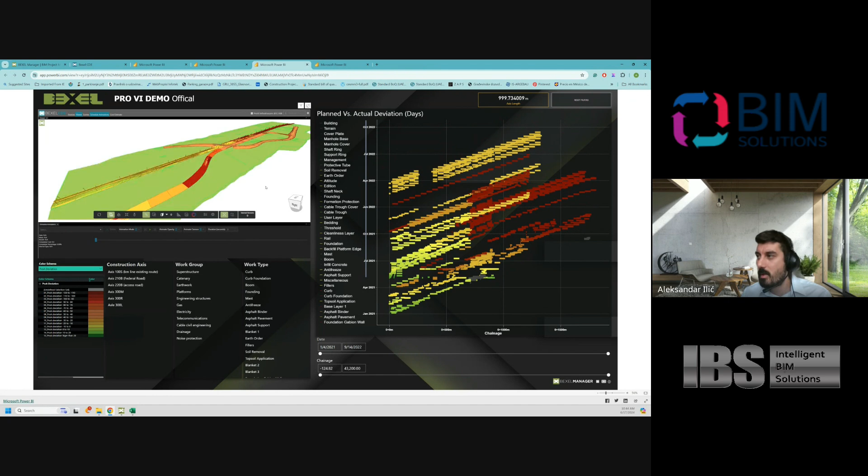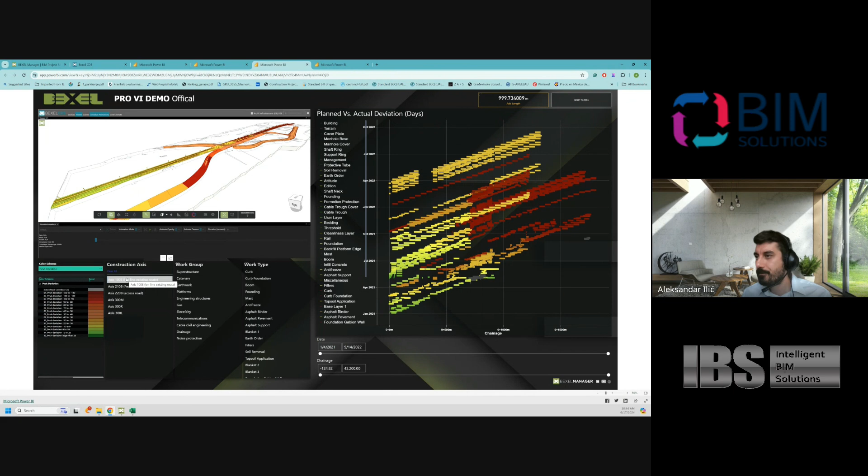And I even plot this to this scatter chart. Right now it doesn't look really clear, but if I say I want axis 1000, the main line of this railway project, and I isolate earthworks only, let me turn this off and zoom in a little bit, I can see, for instance, soil removal groups of work.

I can see exactly how it was executed. This shows from which meter to which meter of this railway line we were working, on which day. So I have a pretty clear linear schedule for these groups of works. A Gantt chart is nice, but it is not what you need on your infrastructure project. This is what infrastructure people understand, because this is how they actually see the project.

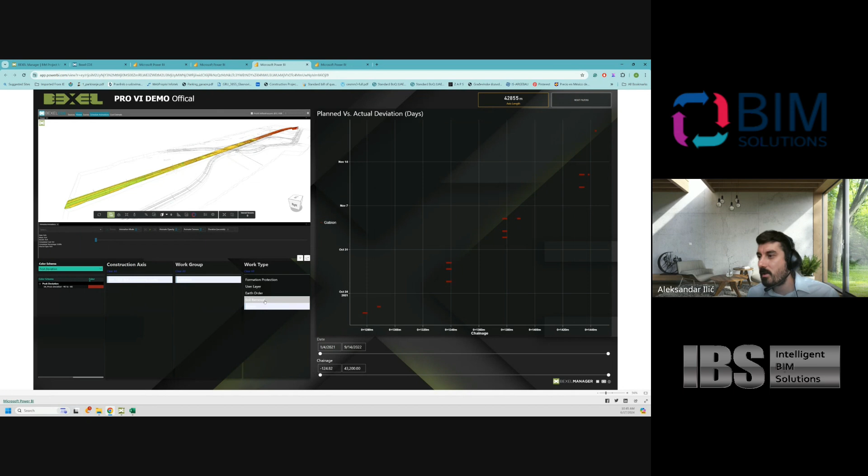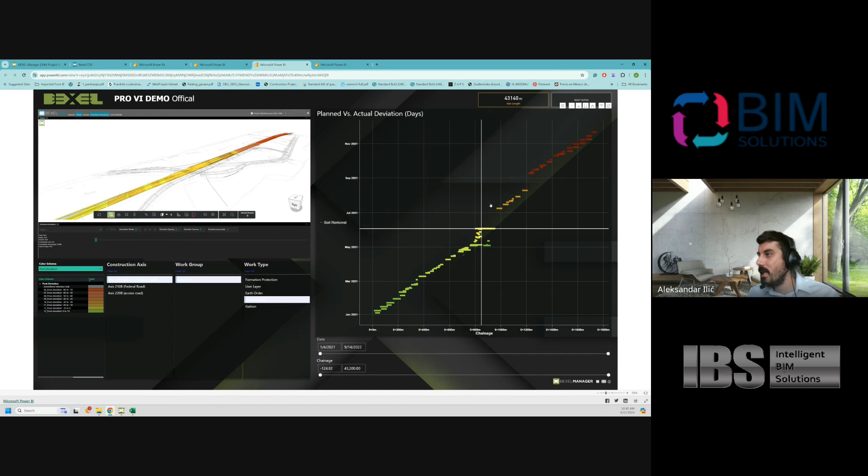They know exactly that this gabion had to be executed from this to this meter, or the soil removal had to be executed in this order, and then they can see if this goes to November, we are late. It had to be in previous days. And we can map all of these. These are just some of the examples.

We have over 30 standardized dashboards and over 100 custom dashboards where you can select every group of work, every subgroup of work, and see exactly: okay, this cost this much, this is the quantity, and those are the elements that are connected to that specific cost item or to that specific axis. I can color code them and so on.

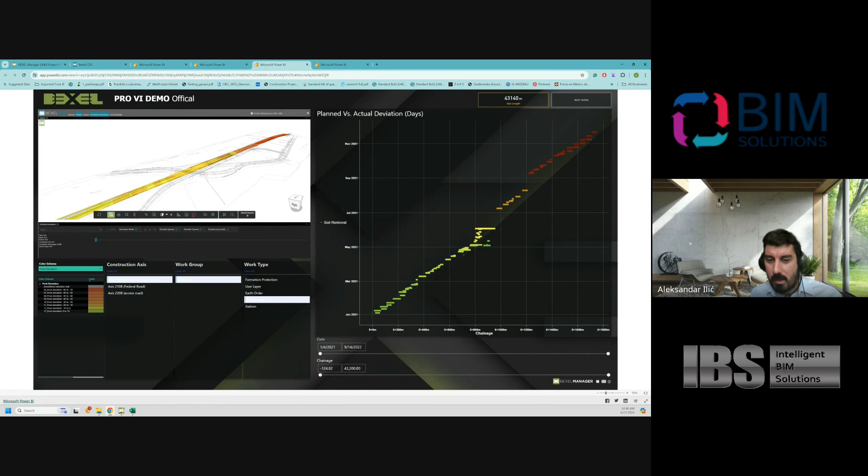What we also have in the Bexel Manager itself, besides this Gantt chart, which can be regrouped so that you can see the schedule differently: you can see the activities on the first level, or the axis on the first level, sub-axis on the second level, and activities on the lowest level.

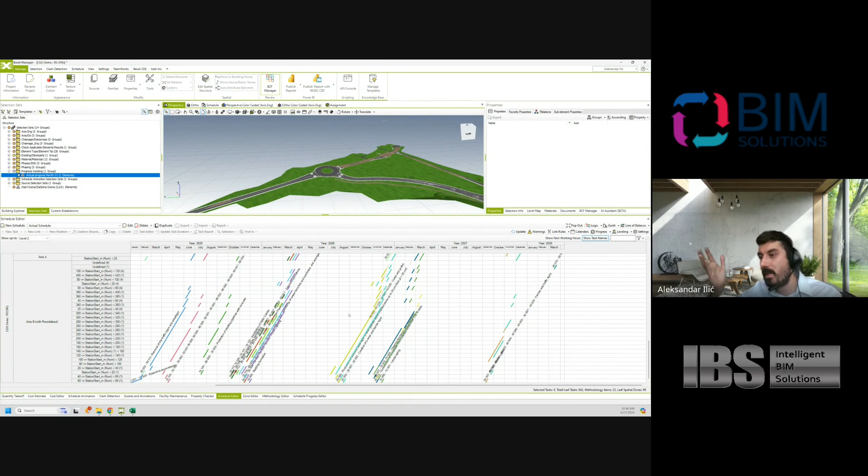You can also see this in the line of balance view, which is a very useful thing if you want to optimize your schedule in terms of continuity, if you want to make sure that your people are not idling on the construction site, that they are actually working at maximum capacity. So let's say here I want to check the axis B. It's for resource optimization? Yes, exactly, for resource optimization.

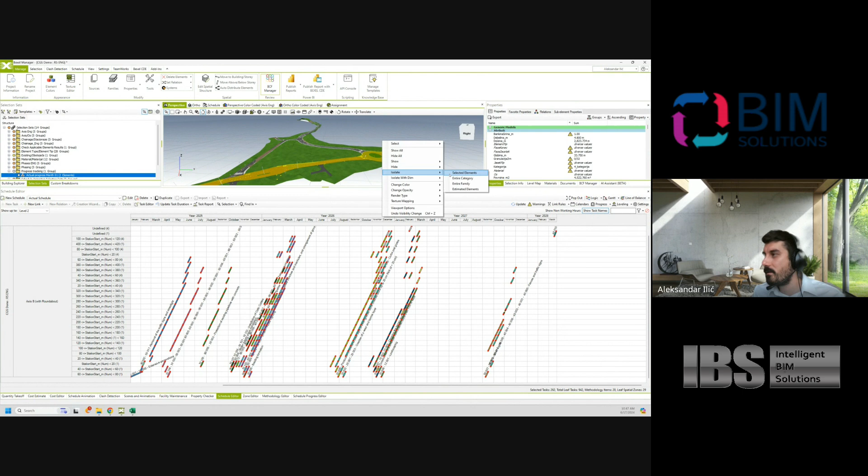But the nice thing is you can find that here and say find this in line of balance. It will select that in line of balance, you say filter selected, and you just see the line of balance on only one line. And if I right click and say select elements, it selects exactly which groups of works this is. I can isolate this, and then find exactly the activity that I want to talk about.

Let's find something interesting, curbs and gates, for instance. I select this activity, select elements, isolate, those are the elements. And this is how it should be executed. Of course, this is not an optimized schedule. Almost certainly in this part I'm going to make these sections a little bit longer because it simply has more material, and I even have the ability to specify by resources, so it calculates based on resources how long it's going to take. But you can see clearly that this is a good linear sequence.

It is very used in Finland. You're more or less close to them, so they have a lot of experience in this. But trust me, I'm an architect, so I had really small experience with any sort of planning or Gantt chart, not even a flow line. But with time, when you have this in the tool, you simply start understanding the whole system, because it is logical in the end. It is a very logical system.

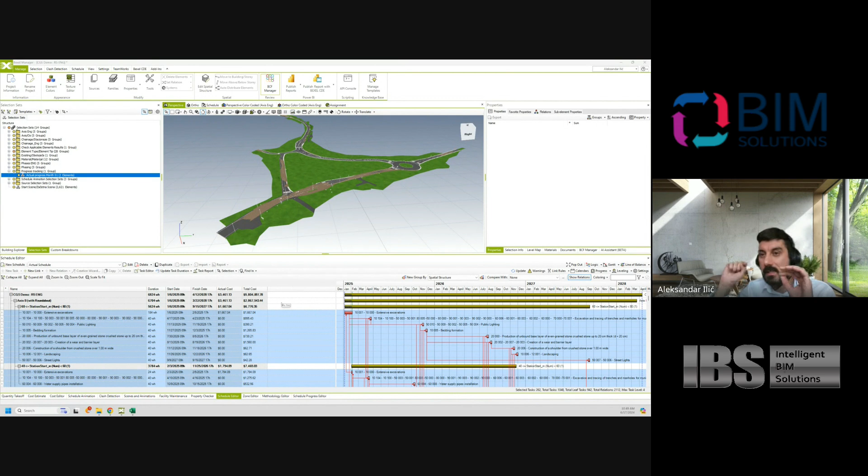The Gantt chart has its own advantages, but line of balance is great, especially for infrastructure, and especially those specific line charts that we created in Power BI. That is the holy grail of planning in infrastructure, where you have chainage on one axis, time on another axis, and you see exactly the line that goes from left to right. That is what people who do serious planning in infrastructure understand. But of course, that will come with time.

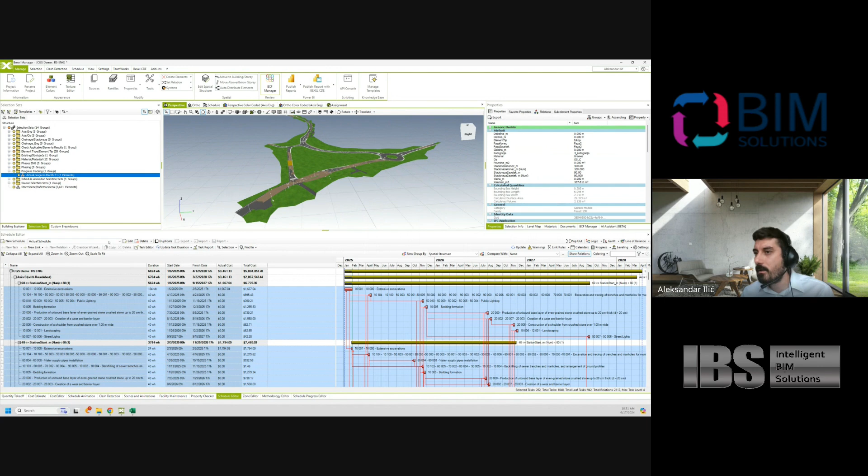I'm just telling you that all of these are tools that you have, that with your expertise you can utilize to a much higher level than what I did with this simple project, just to show you what could be done. You already have the invoicing automatically here. So this is the actual schedule. You simply go to the schedule editor. Sorry, let me just select this and go to no grouping.

You simply go to export payment certificate, and you just say, okay, I want a payment certificate for this month, let's say. I want it on a daily or monthly basis, doesn't matter. Click OK. I'm going to save it on the desktop, just for example, and you get the payment certificate automatically. Yeah, payment request. Exactly. Here we call it interim payment certificate, so it's not the final one. In your case, it's a request for payment, and it looks like this.

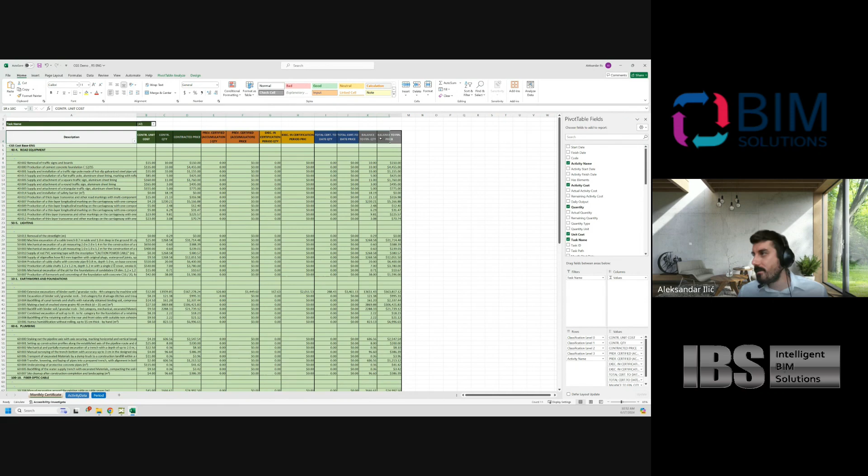This is the standardized one that we created based on our experience. This could, of course, be customized for your needs and specified in your language. But this is contracted quantity, contracted price, previously accumulated, executed in certification period, total certified to date, balance to finish. And you can see, for every cost item here, exactly what was executed. This was only excavation, and you can see the numbers down there. Good.